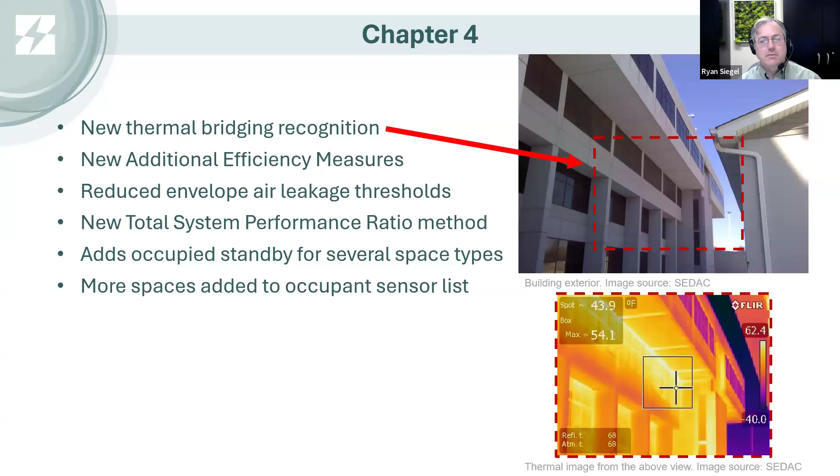We, of course, continue to add more spaces to the occupant sensor list for lighting controls. Also adding dimming requirements to several spaces. So previously we focused on occupant sensing, now adding dimming requirements for many spaces. And that daylight threshold previously was 150 and 300 watts. That is being reduced as, again, controls become more common and perhaps more available and less expensive to install. That cost-effective threshold continues to improve.

And also adding or introducing demand responsive lighting to the code. It's not being added as a requirement, but at least introducing a concept into the code. As well as energy monitoring. This is something that was also added fairly recently to the code. This has been greatly expanded for the requirements to do energy monitoring.

I mentioned earlier about that additional efficiency list being substantially longer and more granularity. So a point is worth a little bit less now, but rather than incrementing, you know, 0.5%, now we can increment in tenths of a percent. So that gives you a little bit more precision when doing this. And also adding renewable energy requirements to the code. So buildings being required to install some renewable energy for that.

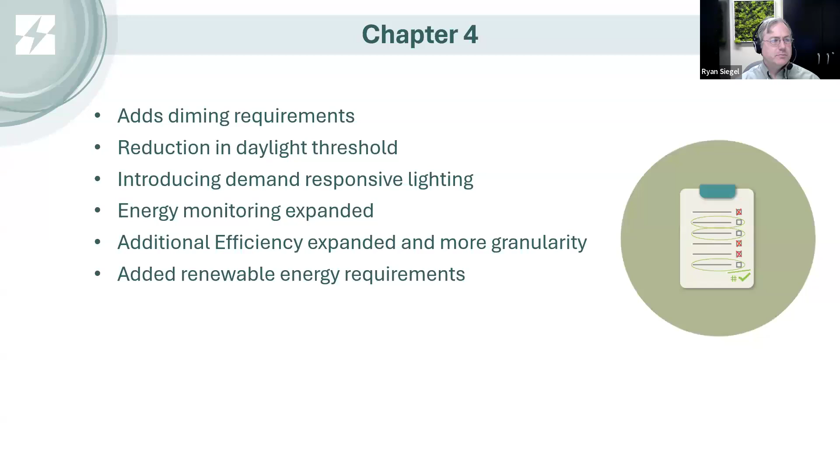Chapter 5 has been greatly revised. You will see a lot of blue text if you go through and look at Chapter 5. Blue text in the online version is denoting new or substantially changed text. So if you go through Chapter 5, you will see a lot of blue text in there. Especially for change of use. Change of use used to be a fairly small section, has a very big impact when you trigger that, but it was fairly small. So this is one area to focus in on because a lot more projects are going to qualify as change of use where in the past they may not have.

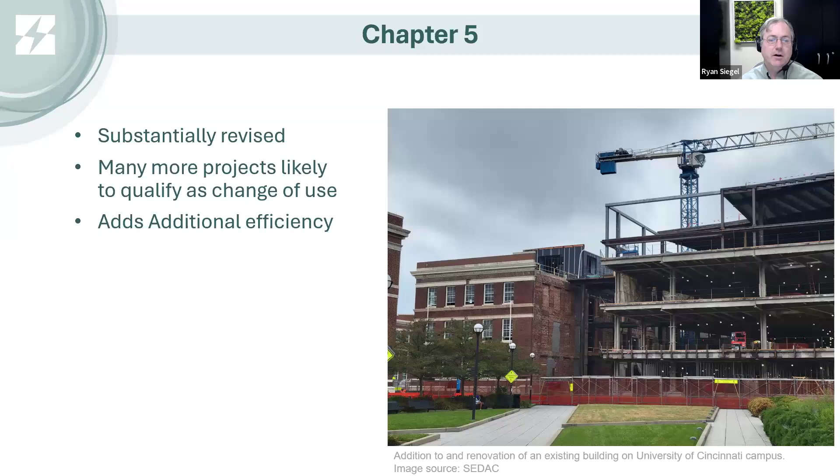So also adds some additional efficiency requirements for additions and large renovations. So whereas previously it's just been very much about whatever you touch, that's what you need to bring up to standard. But as the code is becoming more flexible and saying, okay, rather than dictating this is how you will meet the code, providing that additional flexibility through the additional efficiency measures, which is how do you wish to turn this building up to 11 and give me that little push extra. So for existing buildings, there's now a section to bring additional efficiency into alterations and additions. So those are kind of the highlights of the commercial side.

Looking at the residential side, also see that the intent is greatly expanded and also calls out that the code is focusing on cost effectiveness and life cycle cost, recognizing that every time we bring a new code and the code will improve, often there comes with it some added cost, but recognizing this is balanced with an added benefit over time too. So covering that in the intent and calling that out specifically.

The envelope backstop previously was just a flat backstop, I believe it was referred to an older code. Now the envelope backstop is referring to the current code and is just an adjustment factor. So rather than having to have two code books to do that, you're able to do it with just one. This is more of a terminology, but just want people to be aware. Previously, we used the term UA in the code. This has now been transitioned to TC for thermal conductance. It's a little bit better descriptor as far as what it is. So if you do see TC, we want you to be aware of that change and that it didn't throw you off too much. Also, several new definitions in this code cycle.

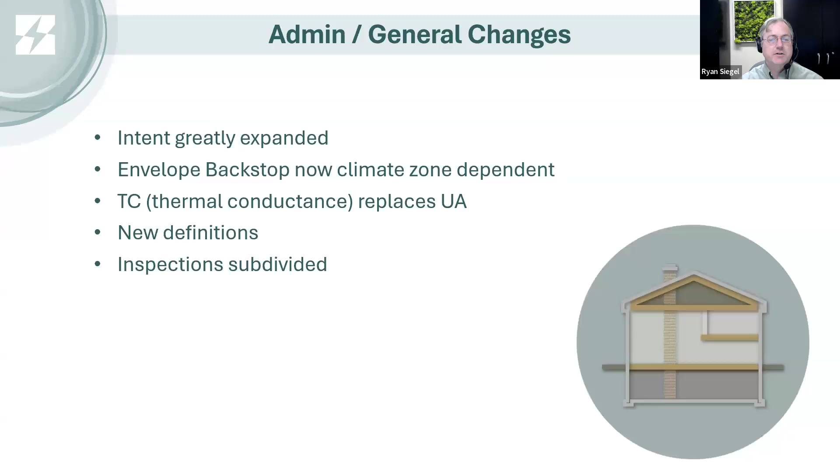Also, trimming that air leakage backstop, similar to the commercial side, that air leakage continues to decrease. Also new to the residential provisions is the multifamily sampling protocol. This previously was in the commercial provisions, but not in the residential. So they've brought that over to the residential.

Also having some new allowances for outdoor systems. Again, previously in the residential, there was almost no provisions for outdoor heating systems. Part of that was because heating systems were required to be sized using a Manual J. Well, if you try to put that outside, there's no way to perform a Manual J to determine the appropriate size of those outdoor heating systems. So trying to align the commercial and residential provisions and borrow back and forth. So these are provisions that previously had been in the commercial provisions that are being brought into the residential side.

Also added some additional requirements for homes and dwelling units that are over 5,000 square feet, recognizing that these very large homes and dwellings represent a very large impact on the energy footprint. And so the code is adding some additional requirements for these larger homes to say, if you're going to build something that large, we want you to go above and beyond just the standard efficiency of those.

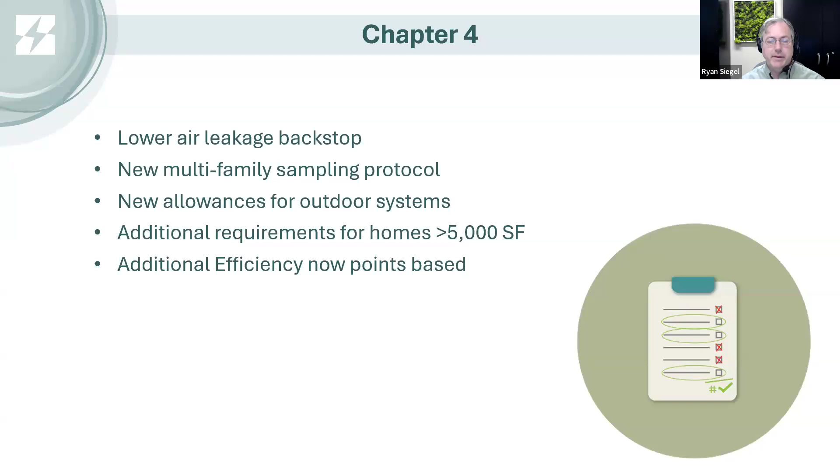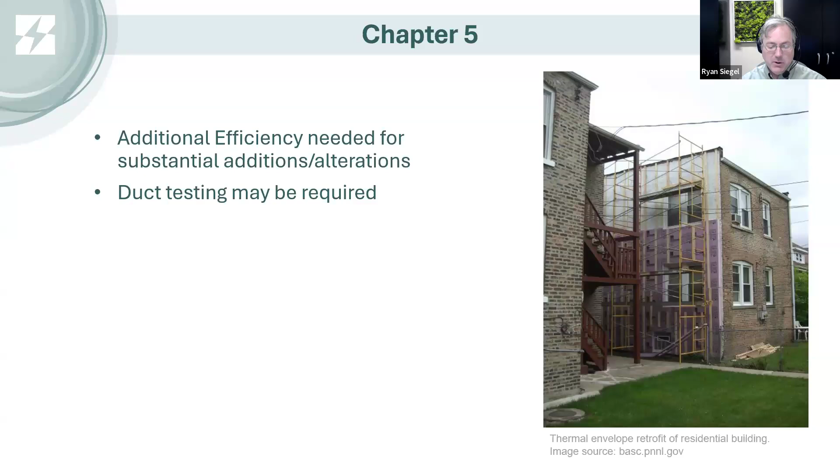As far as Chapter 5, again, for existing buildings, so if you are doing what's called a substantial addition or alteration, or really specifically a substantial alteration. This is a new definition for 2024. There is then the requirement to do some additional efficiency for that. Also for 2024, duct testing may now be required in existing buildings. So if you're doing substantial work to an HVAC system, duct testing may now be required. So kind of the highlights for 2024.

We do have just a handful of amendments for the 2024. That is something Illinois has tried to take a fairly light touch as far as amendments for the 2024 cycle. So if you familiarize yourself with the 2024 International Energy Conservation Code, you'll be fairly well up to speed.

For those of you who do really wish to get into the nitty-gritty, you may find the specific text of the Illinois amendments in the May board packet for the Capital Development Board. It can be a little difficult to read because part of that text is removing the amendments from 2021 and then adding the 2024 amendments. So it can be a little difficult to read. But there's three primary amendments for Illinois, two in commercial and one in residential.

So the first one in commercial is for buildings that don't use heat pumps for heating and domestic water, requiring that they get a couple of more credits in the additional efficiency measures. So an extra 25% more credits. So this represents on a building scale an increase of about 1 to 2% efficiency gain for the entire building.

Part of this is recognizing that combustion heating equipment, or even electric resistance, is substantially less efficient than modern heat pumps that can easily reach into the 300, 400, 500% efficient range. So that's part of what this is introducing, is saying, if you don't use heat pumps, we want this building to do just a little bit extra. And again, this is overall on a building scale, 1 to 2% improvement. So not a dramatic change.

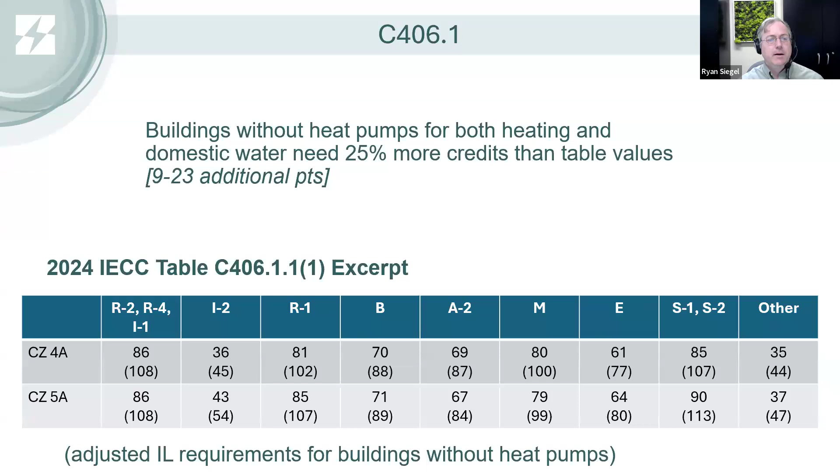The other is electric readiness. So this is something coming over from the Illinois stretch code from the last cycle, adding some electric readiness requirements. You can see here it is restricted to only certain building groups, as well as equipment.

So looking at space heating, connected to a condenser or air conditioner, if you will, 5 ton and less for space heating. So this is not your large, 10, 15, 20-ton units. This only applies for 5 tons and smaller. Similarly, for service water heating, these are smaller units with 50 kBTU. So this is, again, your residential size and scale for this.

Also applying to residential cooking equipment and residential clothes drying. So you see these are more designed to capture residential type uses that may be in commercial buildings. And what this calls out is where you do have combustion equipment that you are bringing a raceway or cable to enable that option of you continue to use gas or electric going forward. So making that ability to have that decision periodically at a much lower cost than trying to install that cable or raceway later.

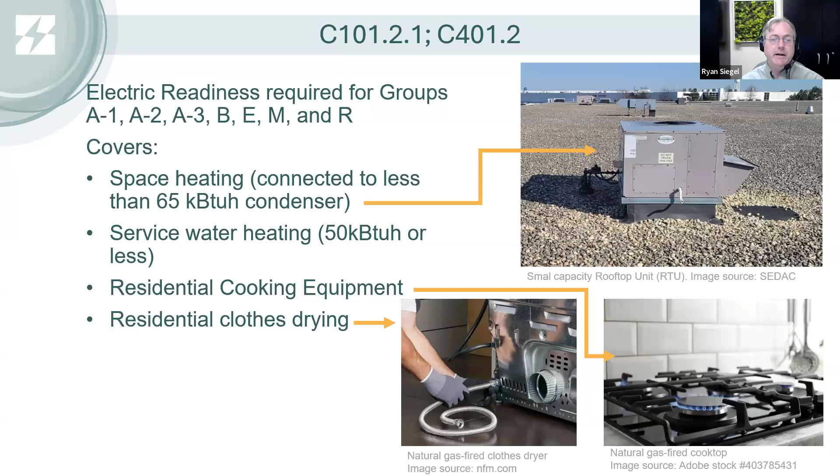So I'm going to go ahead and launch our second poll here. So the first question is electric readiness requirements added to the 2024 IECC by Illinois amendment apply to commercial cooking and laundry equipment. True or false? The second, which Illinois amendment helps to ensure compliant buildings have passive resilience? Electric readiness for small equipment in commercial buildings, a nominal increase in building efficiency for commercial buildings without heat pumps, eliminating the trade-off permitting a worse performing envelope, or no amendments address resiliency.

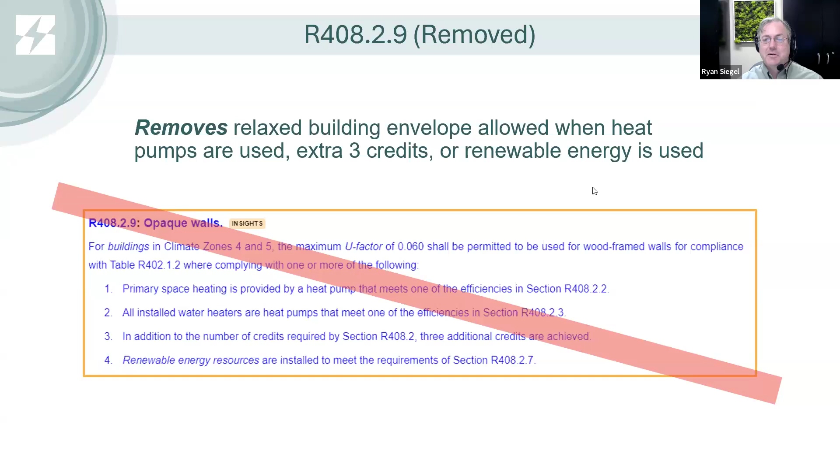Second, okay, definitely some hard questions in this poll. So the correct answer would be eliminating that trade-off, permitting a worse performing envelope. So that's the passive resilience, because again, that envelope is the critical thing for passive resilience. Recognizing that's the part that counts when the utilities are out. So with that, I'm going to turn it over to Robert to start in on our commercial updates in more detail. All right, thank you, Ryan.

Going to keep us moving along here. As I said, we do have a fair amount to cover today, so we may be moving a little bit quickly, but we're going to try to get through all of our slides here.

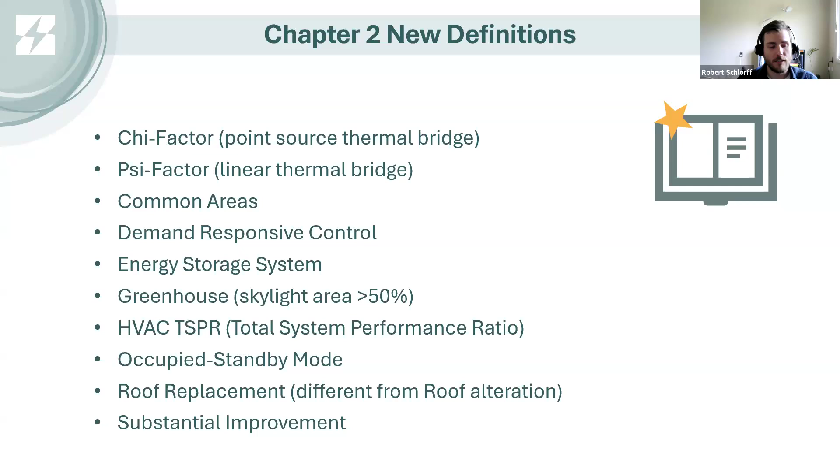So Chapter 2, new definitions. So we do see those Greek characters coming in, the chi and psi factors, those are related to thermal bridging, which I'll cover a little bit more here in a bit. We have a new definition for common areas. Demand responsive controls is defined, energy storage systems, greenhouses. We have to define the new total system performance, HVAC compliance method, occupied standby mode, roof replacement, which is different from a roof alteration, which I'll touch on a little bit later on, and then that substantial improvement definition that becomes a triggering point for existing building projects and whether or not additional efficiency measures are required. So a chunk of the new definitions, this is not all of them, but this is a chunk of them.

Moving on, there have been some updates to the required documentation for commercial projects. So we see here that they've added in documentation of air barrier and air sealing details as well as thermal bridging.

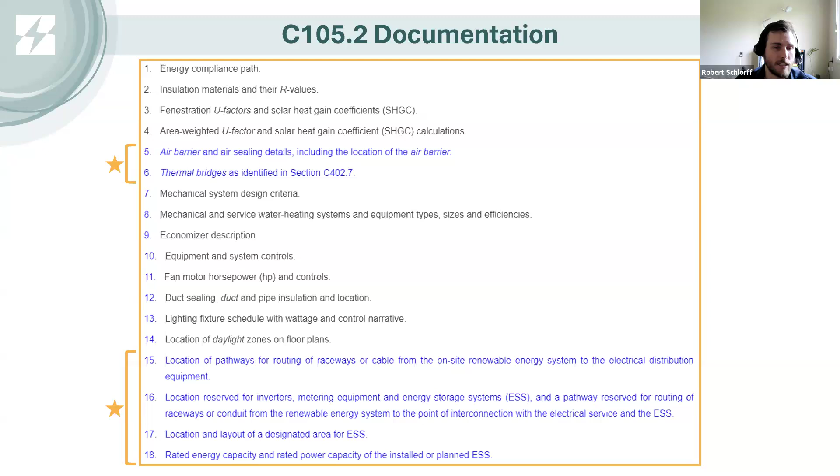So we need to document those elements within the project documentations, the construction documents in some way. We also need to make sure that we're documenting the locations of raceways and pathways for renewable systems as well as specifically marking out areas for energy storage systems if they exist, as well as the rated capacity of those systems that are either planned or installed. So it's a little bit of additional documentation for commercial projects.

All right, so going to talk a little bit about the additional efficiency measures here. And so this is for the commercial side. Increased options and points, as we've discussed. So each credit is now worth 0.1% of an improvement above the baseline. C406 aims for roughly a 7% improvement for each project. So as Ryan mentions, this is how we turn each project up to 11. So that moving up to 11 is about a 7% improvement for each project.

Energy credits must be over and above base compliance. So an example of this is that we can't install better than code minimum windows and take advantage of that in the total conductance, or what used to be UA calculations, and C406. We can only take credit for the better than code minimum windows in one location or the other. So we can't double dip on our measures here. There are some trade-offs allowed.

So another addition to the additional efficiency measures section is a section requiring renewable and load management credits. So that's what the R/LM credits stands for. So there is a little bit of ability to trade off between additional efficiency and renewable and load management credits, but that trade-off is guided within the code. So if you're transferring one way, you have to look at table C406.1.1(2). If you're transferring the other way, there's an equation that you can use.

You can area weight the additional efficiency credit requirements as well as the renewable and load management requirements. They're provided within the code by table based on building type, or building occupancy type. So if your building has multiple occupancies within it, you can area weight the requirements based on the area weighting of your different occupancies within your building.

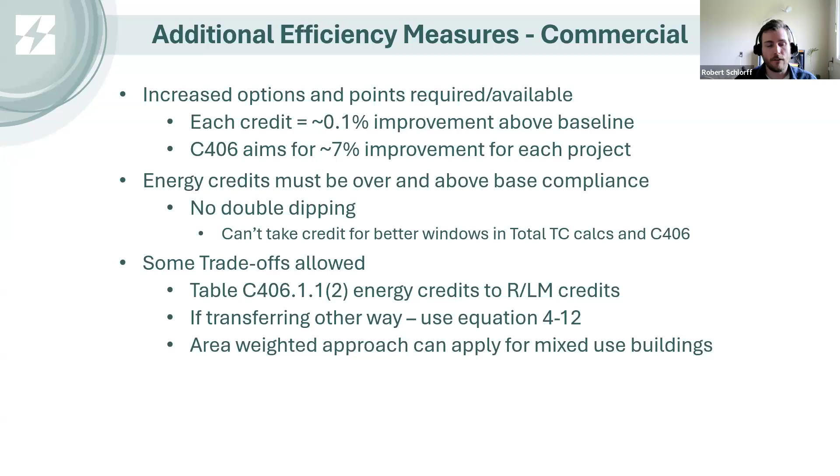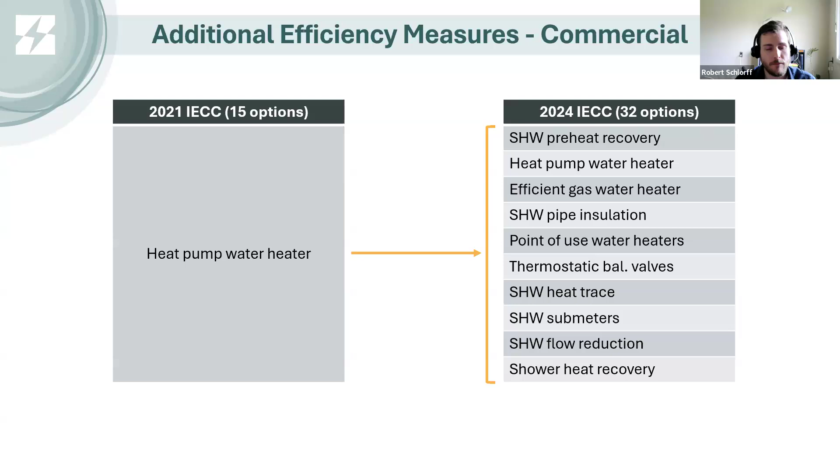So we talked about the expansion of options within the additional efficiency measures. So if we look at 2021 IECC, there were roughly like 15 options. We had one that was associated with a heat pump water heater. Now in the 2024 code, we've got something like 32 options. And as you can see, we have, I think, 10 options that are related to service water heating rather than the single measure beforehand. So this is what we're talking about when we mean that the code has been expanded for additional options and more flexibility for project teams to comply how they best see fit for their project needs.

Breaking down the requirements a little bit further here. So this is the additional efficiency and renewable and load management requirements. So if your project is greater than 2,000 square feet, that project has to comply with additional energy efficiency requirements. If it's greater than 5,000 square feet, we're going to comply with the additional energy efficiency requirements as well as the renewable and load management requirements.

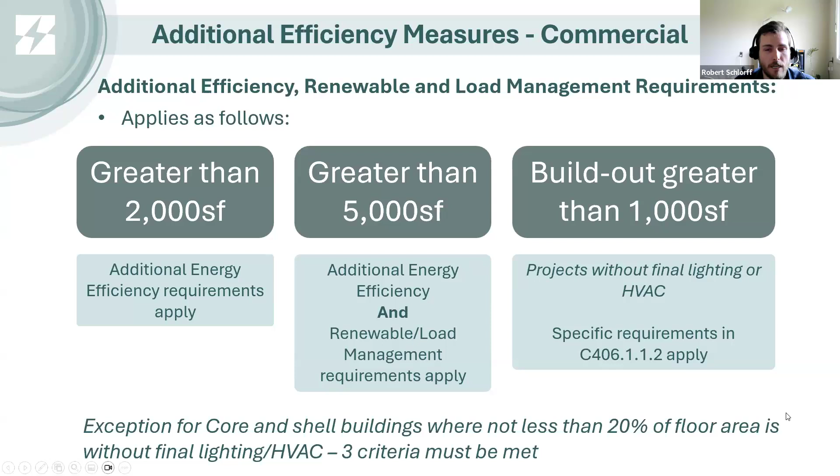And then if it's a build out greater than 1,000 square feet, these are projects without final lighting and HVAC. There are some specific requirements within C406.1.1.2 that apply. There are some exceptions for core and shell buildings where not less than 20% of the floor area is without final lighting and HVAC, but there are some specific criteria there that must be met. But for most projects, remembering these main three categories might be a good start at understanding these new requirements.

Taking a quick look here at some of these tables. So in 2021, we needed 10 points or 10 credits. In 2024, we're going to need somewhere between 35 to 90, depending on the building type and location. If we take a look here at these tables real quick, the point values or credit values in the 2021 table are much lower than what they are in the 2024.

So even for the same measure, the amount of credits offered is going to be higher under the 2024 IECC. So we're requiring a larger number of total credits, but each measure is also generally offering more credits than it may have under the 2021 code. So they're just kind of pushing everything up to allow for more options, and as we said, far more options, up to 32 different options for the measures here.

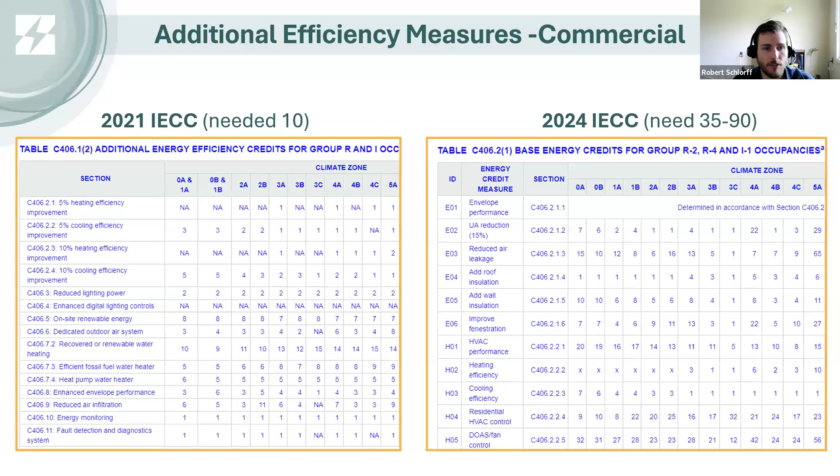All right, so thermal bridging, we'll talk just a little bit further about this, but not too much more today. So the two factors that have been defined for thermal bridging, one is in reference to a point source. So think of like a fastener through an assembly. If it's a metal or a conductive fastener through an assembly, that fastener itself is becoming a bridge for heat to flow inwards or outwards through that assembly.

So these defined terms within the code will tie into the requirements for thermal bridging documentation. And depending on what elements you have in your design, you may have to use both or either of these factors to accurately document the thermal bridges in your project.

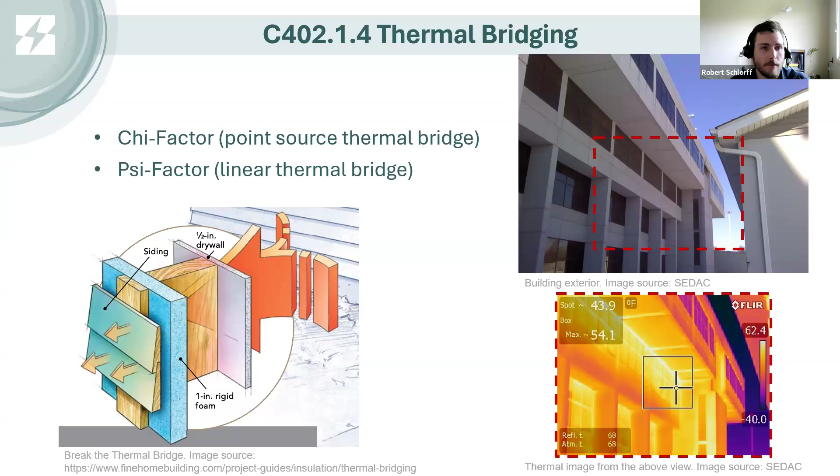So envelope air leakage, as Ryan mentioned, the requirements for envelope air leakage have been ratcheted up a little bit. So the air leakage limit has been reduced from 0.4 in the 2021 code down to 0.35. And this is at 75 pascals of pressure, the test pressure that we do for commercial buildings. There is still kind of the buffer for performance, or the pass with diagnostic testing and remediation. So if the project achieves between 0.35 and 0.45, that project can pass without further leakage testing as long as diagnostic testing and remediation is performed.

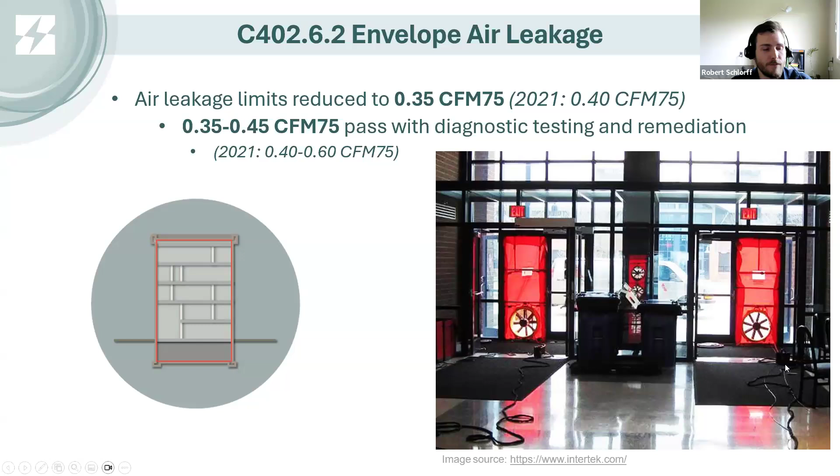This was also available in the 2021, and the limits were 0.4 and 0.6. So it functions the same, but we can see that those limits are reduced. So efficiency is increased within the 2024 code.

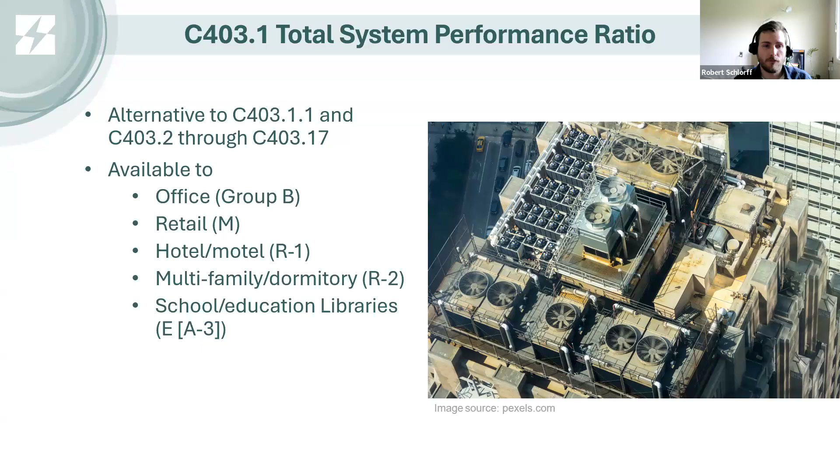But a key here is that this only applies to certain occupancies. And if you can't apply this to your project, then you must follow traditional prescriptive compliance through C403, or your project must go through the performance path of C407. So this is a prescriptive alternative. It still is within prescriptive compliance, but it's an alternative to C403.

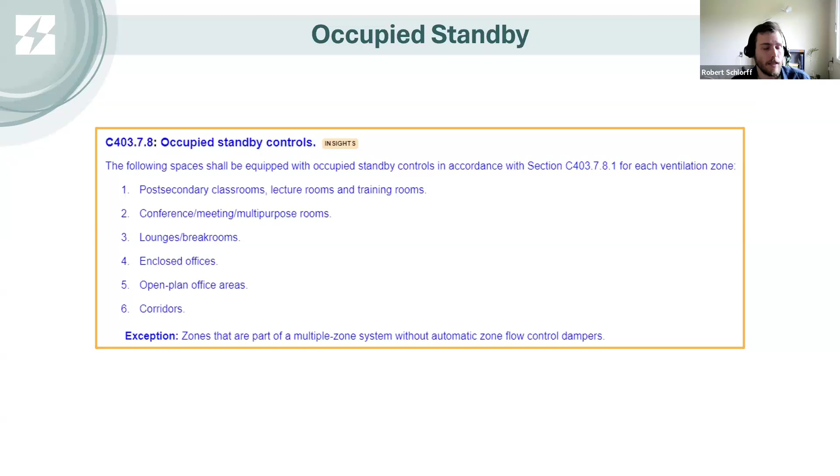Okay, occupied standby. So Ryan touched on this a little bit earlier on, but basically the idea here is that if we have a space that's scheduled to be occupied, but an occupancy sensor indicates that no one's there, we want to be able to adjust the set points within that space because there is no one in there, so we don't necessarily need to have the full airflow and make sure that we're right on our temperature set points. So the spaces listed here need to have occupied standby controls. It's a fairly short list at the moment, but includes things like enclosed offices, conference and meeting rooms, lounges and break rooms. And these controls need to have the functions that are provided in this section.

So we need to be able to adjust the heating and cooling set points by at least 1 degree. It can be more than 1 degree, but by at least 1 degree. And then we need to be able to adjust the airflow supplied to the zone. So basically, if the zone doesn't have anyone in it and it's at set point temperature, we don't need to be providing ventilation air into that space. So that's what these occupied standby controls are for. And then there's also specific requirements for multi-zone systems.

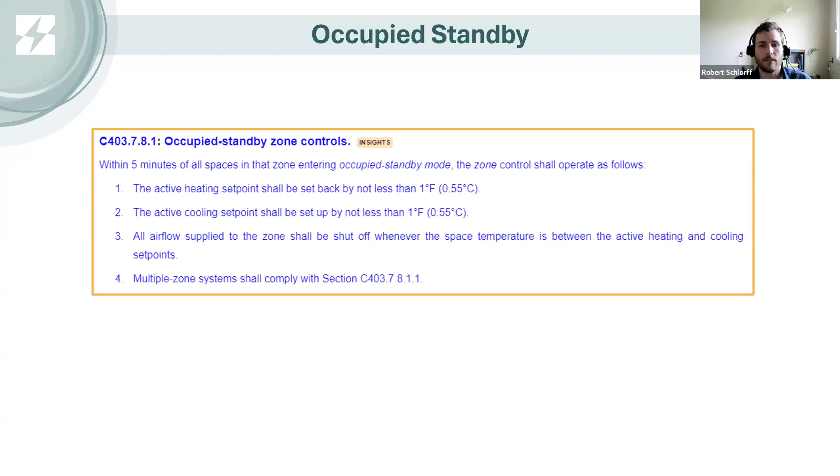Occupant sensors. So getting into some lighting controls, as Ryan mentioned, there are some new spaces added to the occupant sensor list.

So we now have computer rooms and data centers, as well as medical supply rooms in healthcare facilities, laundry and washing areas, and then telemedicine rooms in healthcare facilities. So again, notice that they're being very specific about the healthcare facilities. We're focusing on spaces where patient care isn't provided.

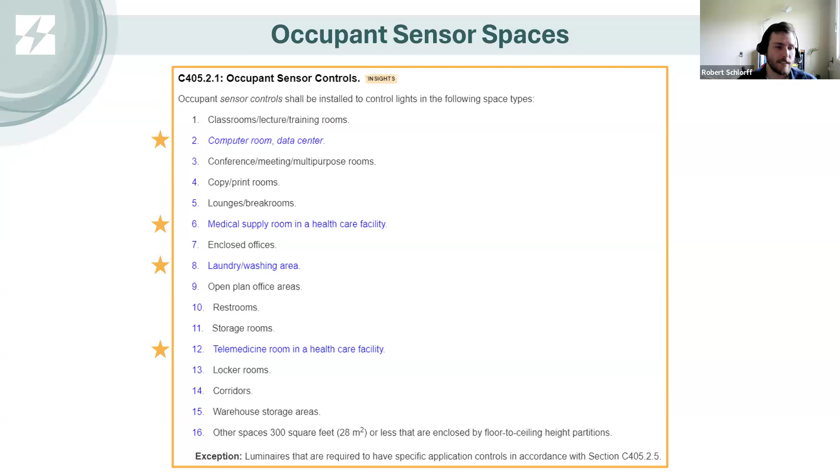Moving on, dimming, we have an entirely new list of spaces that require dimming controls. There is some overlap between the occupant sensor list and this dimming control list, so keep that in mind. But many spaces will also require dimmers under the 2024 code.

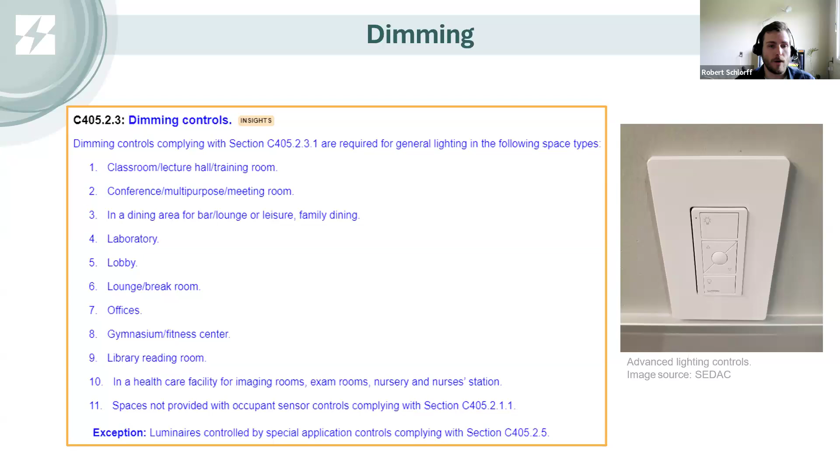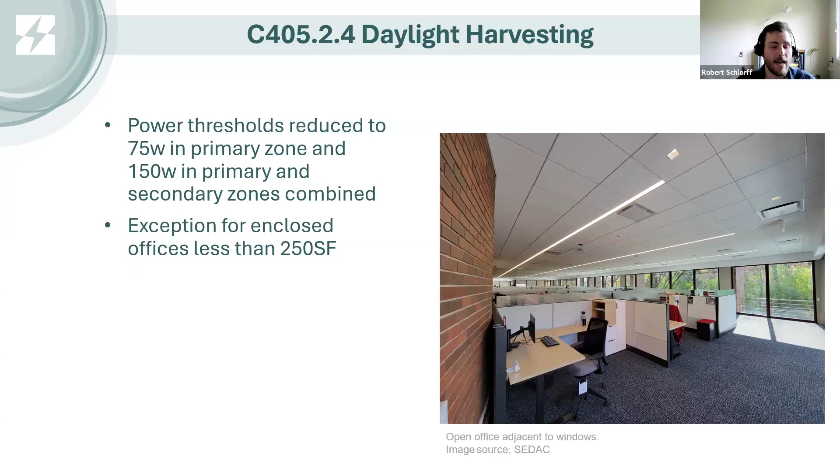Daylight harvesting. Power thresholds have been reduced both in the primary and the secondary zones. And then there's an exception for enclosed offices that are less than 250 square feet. A 250 square foot office would be limited to like 150 watts of total lighting anyway. But the main goal here is to prevent spaces like in the picture from being lit when there is adequate daylight available.

Okay, energy monitoring. So energy monitoring now applies to new commercial buildings that are 10,000 square feet or larger. In the 2021 code, this was 25,000 square feet. On the electrical side, we now need to monitor hot water heating as well as the other items that were previously listed under the 2021 code.

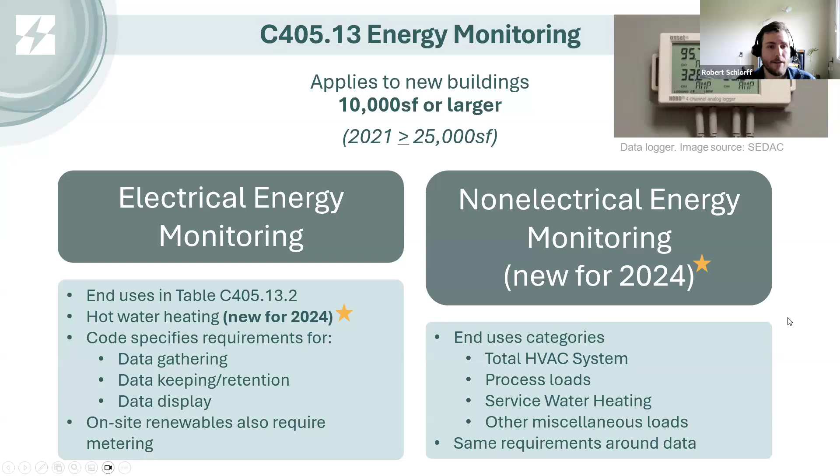And then for non-electrical monitoring, this is an entirely new section for 2024. We want to monitor total HVAC systems, process loads, service water heating, or other miscellaneous loads that may not be electrical loads. This sort of data gathering is really, really helpful in terms of knowing how your building is performing or even knowing what needs to be fixed if it's broken.

Touching quickly on the renewable energy requirements. So this applies to all commercial buildings in climate zones 0 through 7. On-site renewables, there's a requirement to produce 0.75 watts per square foot. This is limited to the gross conditioned floor area of the 3 largest floors. There are some exceptions. However, if the exceptions apply, you still have to provide off-site renewable energy. So no matter what, renewable energy is required, it's just a question of whether it's on-site or off-site.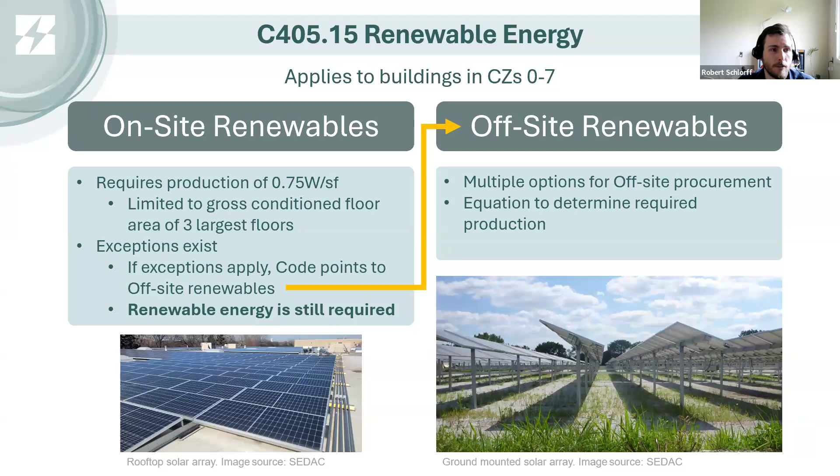As I mentioned, it is 0.75 watts per square foot for on-site systems, and then there are a list of exceptions that will capture situations where on-site systems wouldn't produce very much power or wouldn't make financial sense. So there are some exceptions listed there.

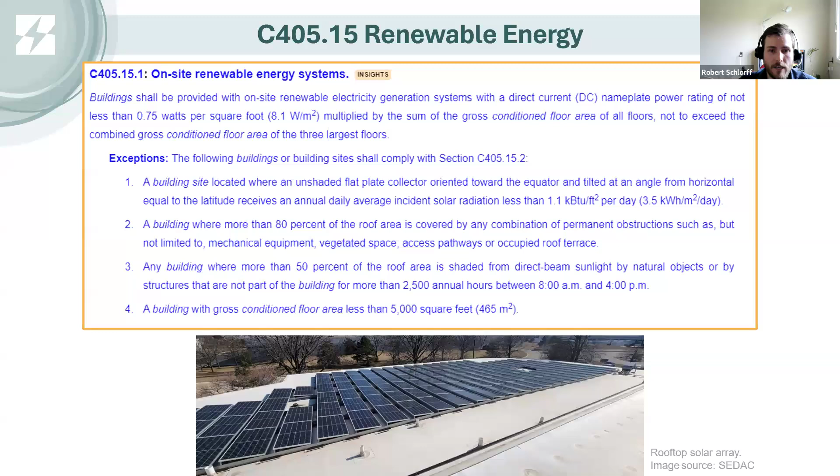The simulated performance path, there has been a change here in the calculation to determine the percent of annual energy cost of the standard reference design. This equation now includes the energy efficiency requirements that would be required for the building type. So basically, the goal or the target of the simulated performance path now includes the energy efficiency credits that would be required if you were going through the prescriptive path.

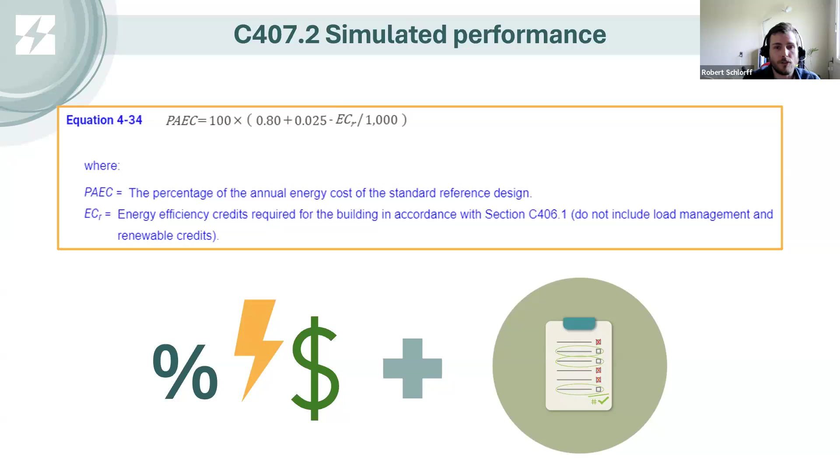So basically, this is saying we've included the additional energy efficiency requirements within the performance path. So if you go performance, you don't have to worry about that. They are included within the calculations.

All right, going to keep moving on here to the existing commercial sections. So, change of occupancy or use, as Ryan said, this is a somewhat big change that could catch a larger number of projects. Certain occupancies only need to comply with C503 rather than C505. Those are listed there at the top. There is a 5,000 square foot threshold for this, so projects that are under 5,000 square feet won't fall under change of occupancy or use.

But the main difference here is that the determination of whether a project needs to comply with the additional efficiency measures or not, or needs to comply with the full change of use requirements, is whether or not it triggers the energy use intensity rank here. Beforehand, the code was phrased something along the lines of if the energy use of the building increases or the energy intensity of the building increases, that was usually determined by an increase in electrical or gas service size or increase in HVAC equipment size.

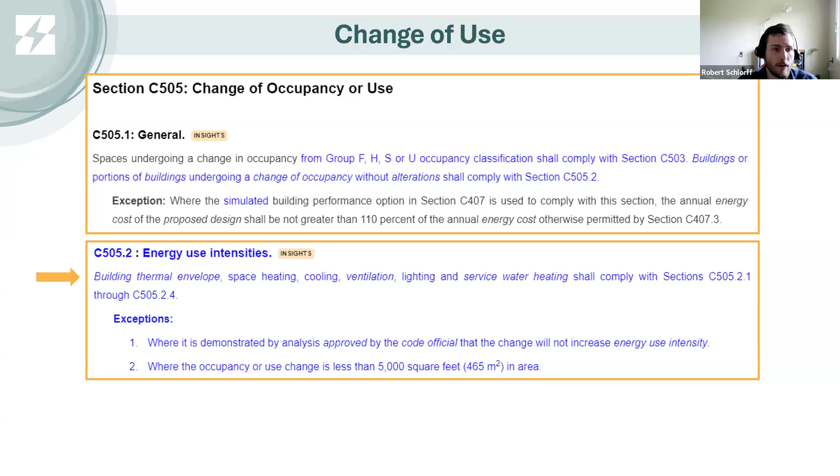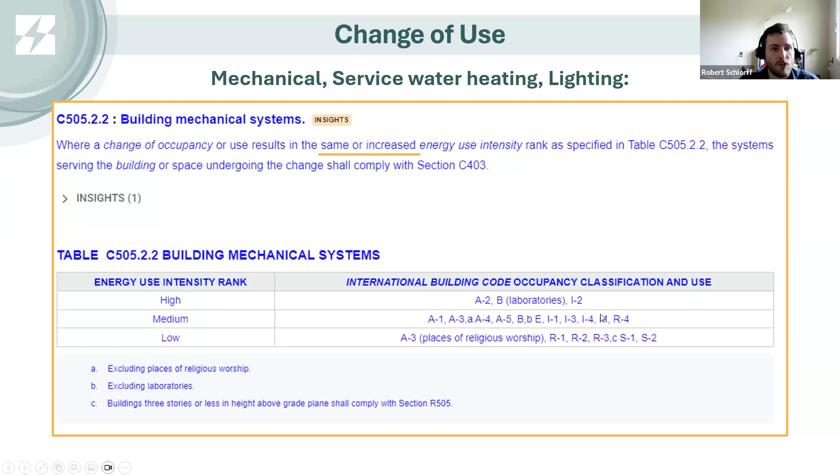Now, there are actually tables, such as this one, that rank energy use intensity based on project occupancy classifications. So the sections are now written such that where a change of occupancy or use results in the same or increased energy use intensity, then it must follow the full C505 requirements as if it were a new building. So basically, if you were moving from an A1 occupancy into a B occupancy, you would have to follow C505 and the full requirements as that is in the same energy intensity rank. So only if you move down would you avoid these requirements.

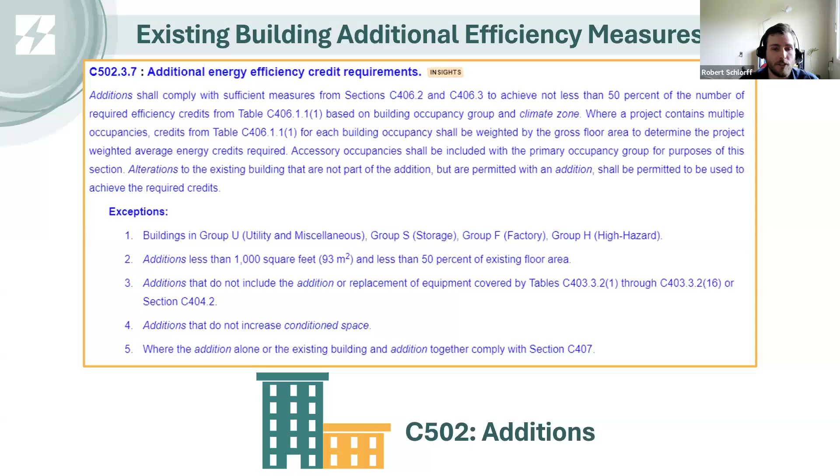Existing building additional efficiency measures. So for additions, they need to achieve 50% of the number of credits required for what the new building would be if it was new construction. So a real quick example here: if we've got a 3,400 square foot commercial office addition, that's Group B occupancy, climate zone 4A, this project needs to achieve 35 credits. If we just go to the table and look, it says 70 credits, but since this is an existing building addition, it's 50%, so 35 credits.

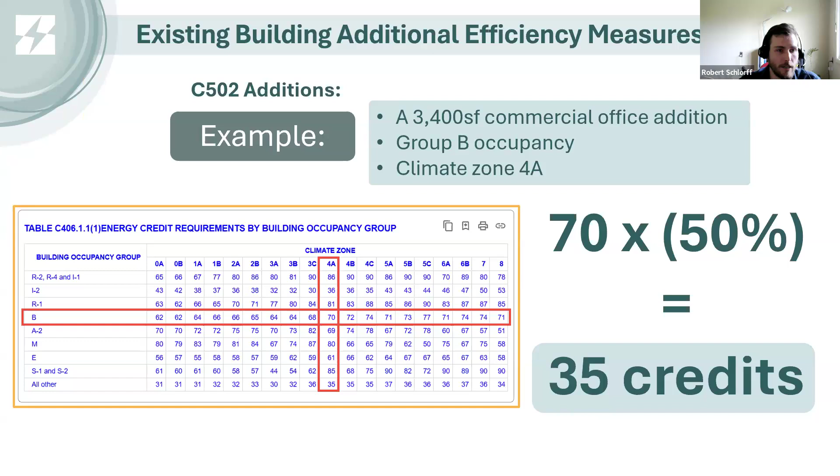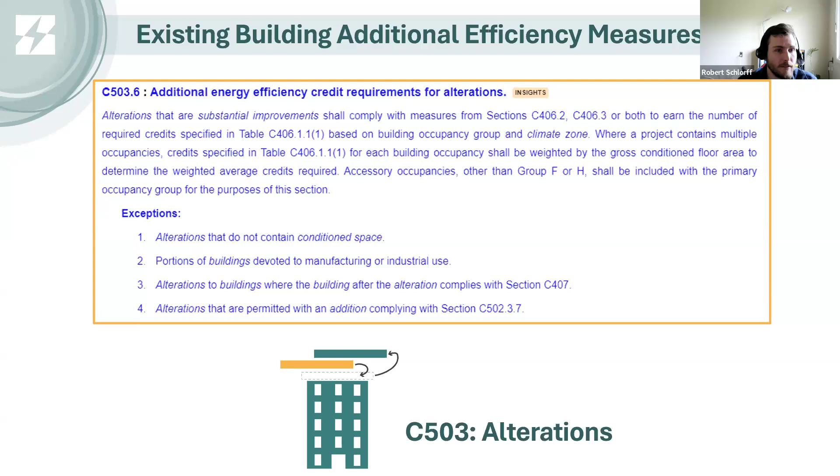Building additional efficiency measures for alterations. This is where the definition of substantial improvements comes in. If the project fits under the definition of substantial improvement, then it must earn the number of required credits that would be required for a new building under C406. So substantial improvement, we have that slide here.

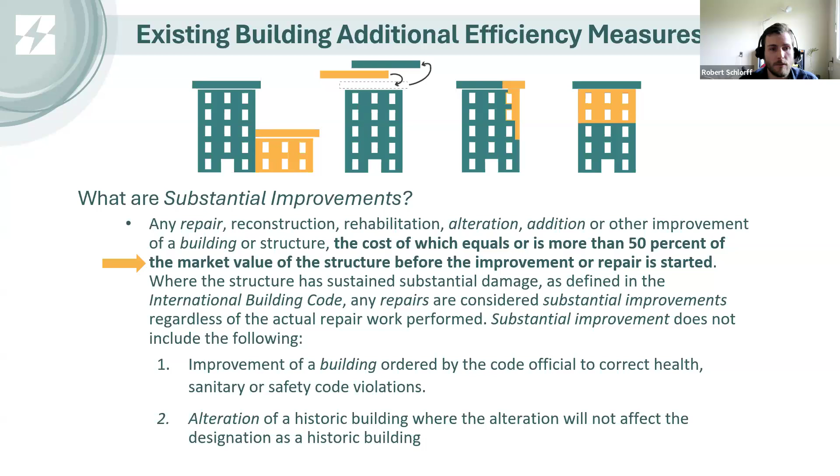Substantial improvement is defined as any repair, reconstruction, rehabilitation, alteration, addition, or other improvement of a building or structure where the cost equals or is more than 50% of the market value of the structure before that project was started. So if you trigger this 50% of market value mark, then the code is going to basically treat that building as a newer building in terms of additional energy efficiency requirements. Okay. Whoops. Moved too quick there.

Another big item that is related to roof replacement projects is that the 2024 code now requires, anytime rooftop HVAC equipment is replaced, the equipment curbs need to be increased in height such that the next time a roof replacement or roof alteration project is done, that curb is no longer an obstacle to installing the full code compliant insulation. So in climate zones 4 through 6, these curbs need to be 17 inches from the roof deck up.

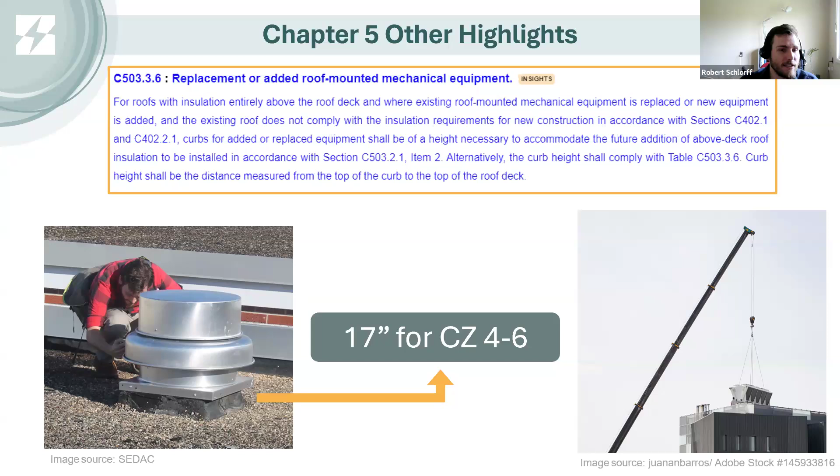So again, this is just basically eliminating a potential barrier to installing full roof insulation, as it is often a fairly expensive thing to get a crane on site and lift this equipment. So we want to get to these curbs when the crane's already there and the equipment's already being messed with.

Okay, so touching on roofing real quick. A roof replacement is very clearly defined within the code as an alteration that includes the removal of all existing layers of the roof assembly materials down to the roof deck and the installation of replacement materials above the existing roof deck. In some discussions through the code development process, we've come to understand that there is another roof project type that is not specifically defined within the code, and that is just a roof alteration.

Roof replacement is a specific type of roof alteration, but a general roof alteration is any altering of the roof system that may require peeling up an existing membrane, removing some insulation but not all, installing new insulation, and then installing a new membrane down.

So the key point here is basically that a lot of roof replacement projects out there are actually roof alteration projects. So make sure that if you're a contractor or you work with contractors who are doing roofing projects, that they're being specific about what project type their project is falling under. Is it actually a replacement of all materials all the way down to the deck, or is it just an alteration that may not include all of those materials down to the deck?

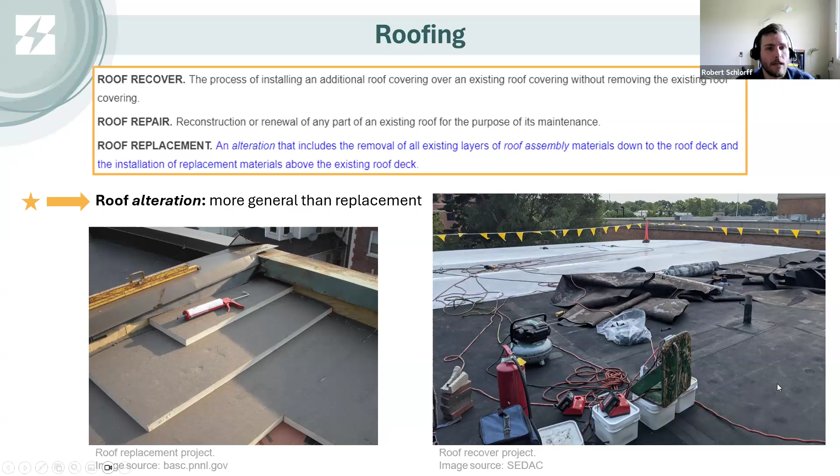All right. At this point, I'm going to launch our next poll question here. So our next poll questions are: how will the updated change of use provisions impact existing building projects? Your options are: more projects will be qualified as a change of use; the entirety of the building will be required to be brought to code regardless of the area being changed; it will enable buildings to meet building performance standards, or BPS.

Second question: why does C503.3.6 require raising roof curbs during equipment replacement? To add cost to projects, to make the equipment easier to access for maintenance and repair, or to enable a future roof alteration project to install the required insulation.

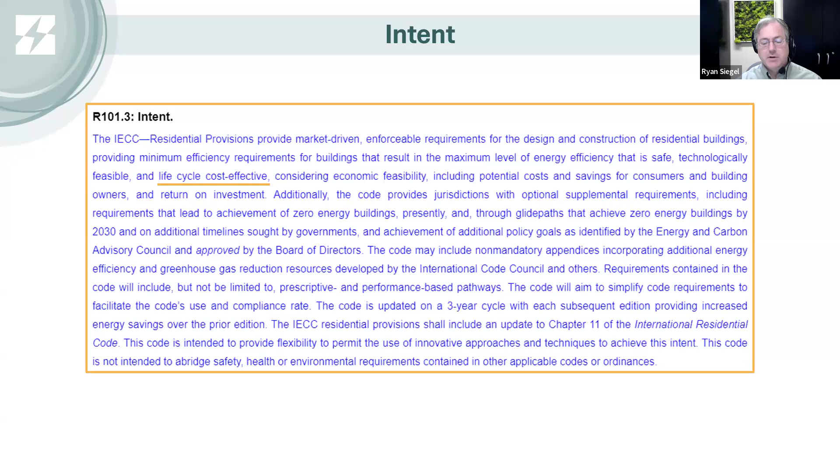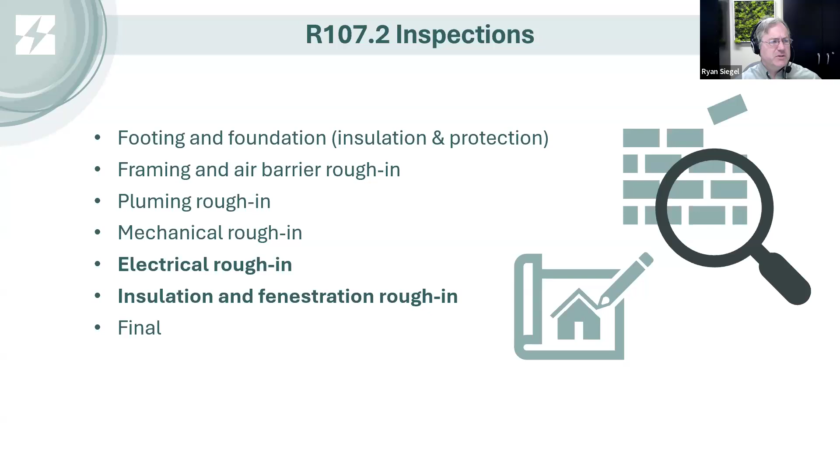So as far as inspections, calling out that they broke out the air barrier from the insulation, as well as adding to the electrical rough-in inspection, with more and more controls being required. So inspections have grown in the residential provisions.

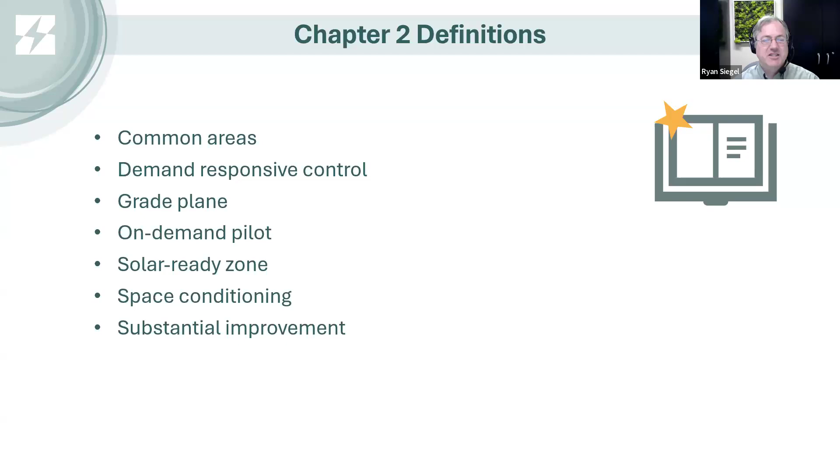So a few new definitions: common areas, demand responsive controls, grade plane, that's a new one for the residential, and on-demand pilot. The code has not permitted continuous pilots for some time, especially for lighting fixtures. So adding on-demand pilot, solar ready zones, as we're now adding renewables, or at least provisioning for renewables into the future, space conditioning, as well as substantial improvement has been added for residential.

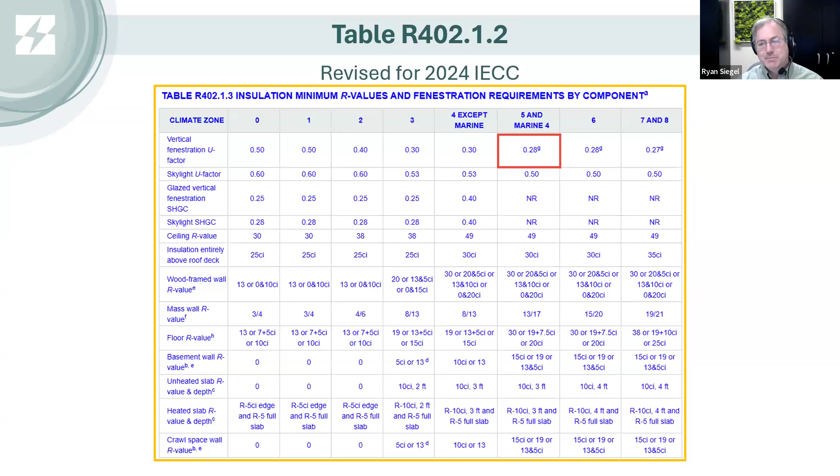So this is a note as far as when you look at the table. This table has been transposed, which is why the entire table is in blue, even though for our climate zones, it's only the vertical fenestration U-factor that's been improved slightly. It's moved from 0.3 to 0.28, but the entire rest has been the same. So the table, they've just pivoted the rows and columns for that. So just being aware. Some of these changes have not been nearly as dramatic as they show up in the text.

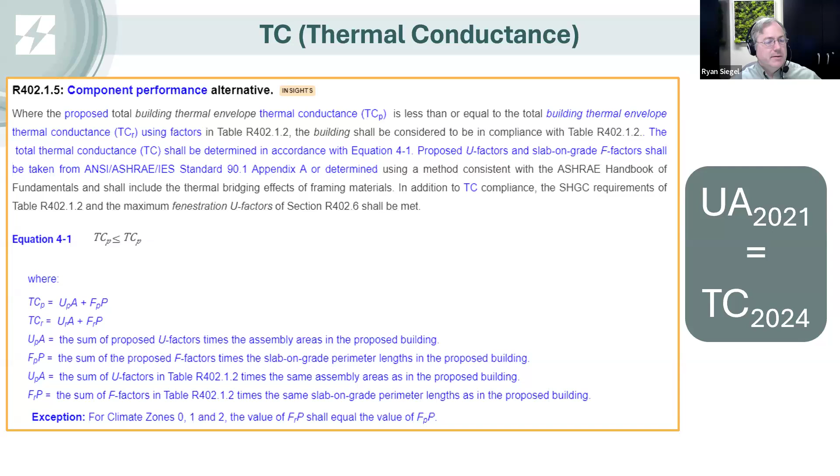So here again for component performance alternative using the TC rather than the older UA standard for that. Well, this table continues to be adjusted over time, R402.5.1.1. You see here knee walls have now been added to this table.

This is a really good table to key in on, as oftentimes most of the building science and building issues we encounter go back to things that were missed from this table. As you notice, this is for air barrier and air sealing criteria, along with insulation installation criteria. So these are some very good things to key in on as far as designs and inspections.

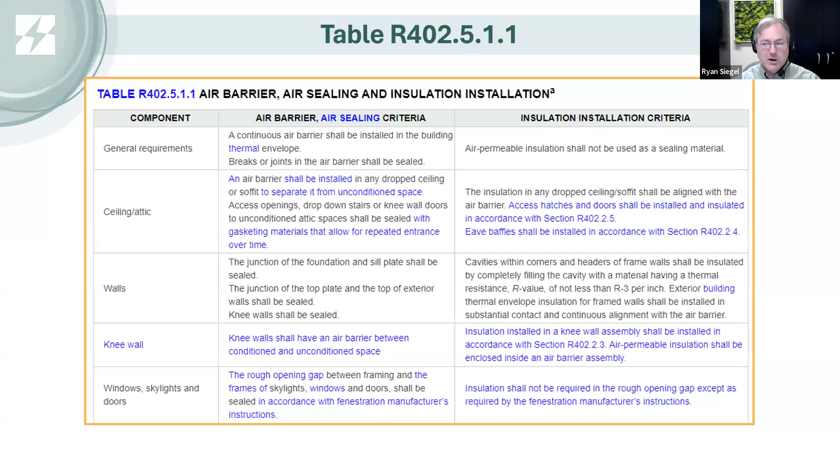Mentioned about unit sampling, so recognizing you might have a commercial, a residential building. Apartment buildings can be rather large and still qualify as residential buildings, as they would be 3 stories or less in height. So sampling allows for sampling of 20% of units. So if you've got buildings with 8 or more, you've got to test at least 7 or 20%, whichever is more. There's also a provision in here where in the event that a unit does not pass, additional testing is required. So again, this is similar to the commercial provisions.

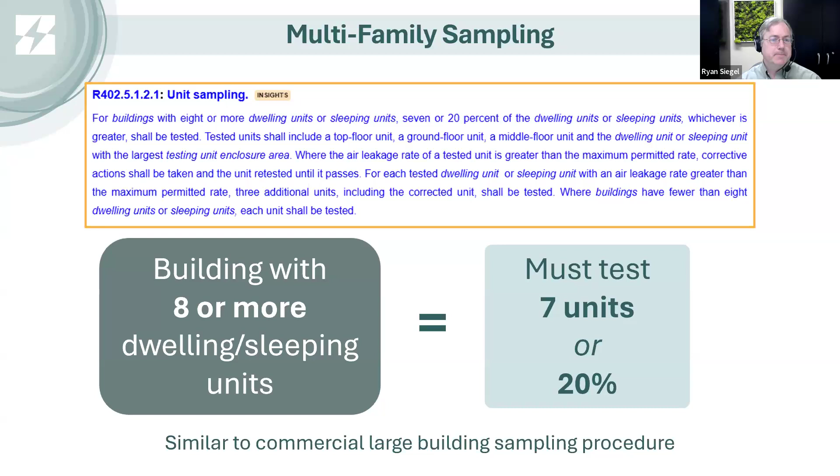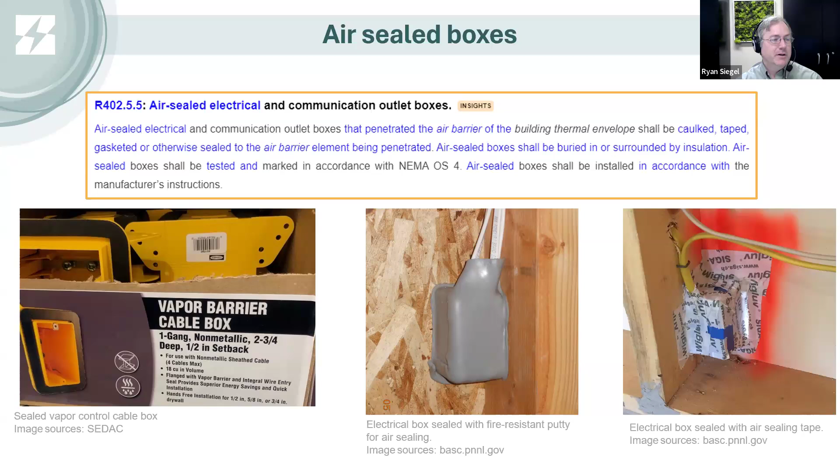Air sealed electrical and communications boxes. So this is for boxes that actually penetrate the air control layer or your air barrier. So one of the things to key in on is identifying where is that air barrier and is this box penetrating that. Part of this is also making sure that you install it in accordance with manufacturer's instructions, as oftentimes there is some additional sealing. It's not just the product, but it's a product with installation method to achieve that. So making sure we follow those manufacturers' directions.

Duct leakage has now been added based on the number of ducted returns. So systems that have more returns often are able to provide better airflow at lower pressures. So in operation, that's where they're giving you some additional allowances for air leakage if you have more returns or more ducted returns specifically. So this table has grown. Previously, it was 3, 4, and 8. So you also see there's an additional row in here for space conditioning equipment.

It's not installed, but the ductwork is located entirely in conditioned space. So previously in the 2021 version, it didn't specify whether the equipment was installed or not. So few changes for duct leakage.

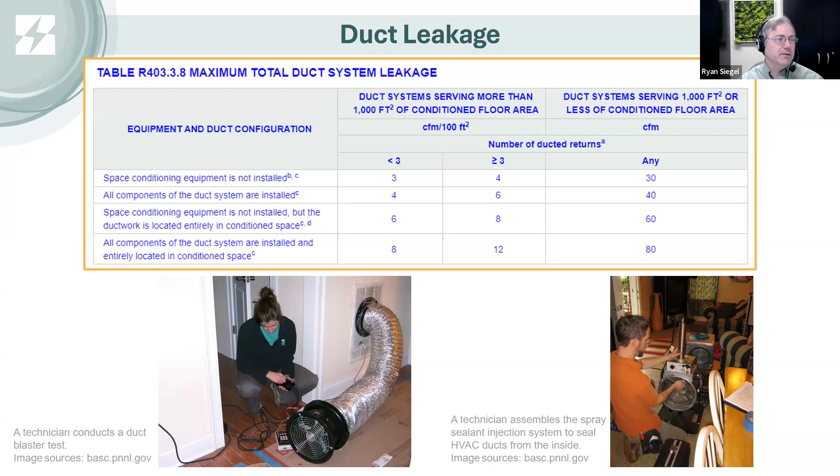Pipe insulation, previously it said just an R3 for the pipe insulation. Now it calls for a 1-inch thickness of pipe insulation. They also do have a conductivity range there as well. So if you wish to use a different material of a different thickness and not just automatically go with the 1-inch, that was determined based on that conductivity, and there is a provision to allow you to use a different thickness if you use a different conductivity insulation for that.

But this is going to be an increase in insulation, as you see in this range, moving from an R3, we're now moving up into almost an R4 or R5, depending on your temperature rating.

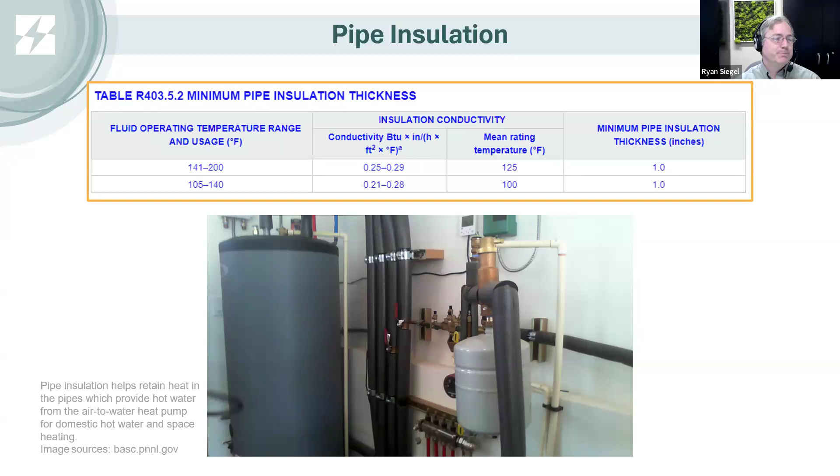So toilet exhaust. This is another notable change: it now requires either a time control, occupant sensor, humidity control, or contaminant control for that. So just your standard toggle on-off switch is no longer permitted for intermittent exhaust control for bathrooms. So you now have to have some form of automatic control so that we don't end up inadvertently leaving the exhaust fans running for hours on end accidentally.

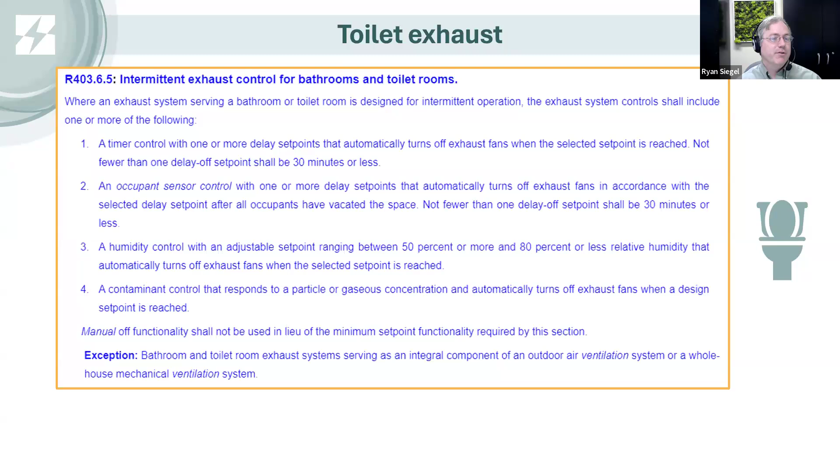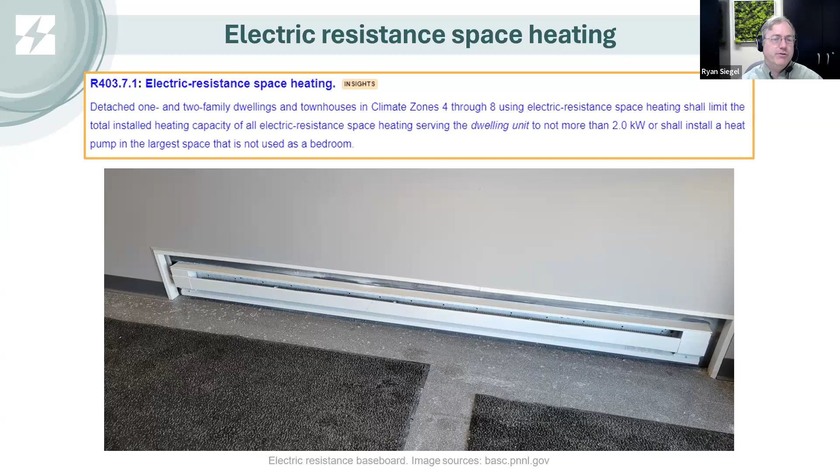Electric resistance. So if you have detached 1- and 2-family dwellings and townhouses, if you do not use heat pumps, you are limited to no more than 2 kW of all electric space heating for a dwelling unit. So being aware of that. So you do need to use a heat pump if you wish to have heating larger than 2 kW for a one, two family dwelling or townhouses.

Mentioned bringing the outdoor heating provisions over from the commercial side, so now allows for heating outside. These do need to be radiant as well as controlled by an occupant sensing device or a timer switch, such that we don't accidentally leave these on when no one is around presently.

As well as some new controls for roof and gutter de-icing. So you'll notice here talks about moisture sensors, because obviously we don't have to de-ice if there is no moisture present. And then similarly, daylight, so we're trying to minimize the operation of these.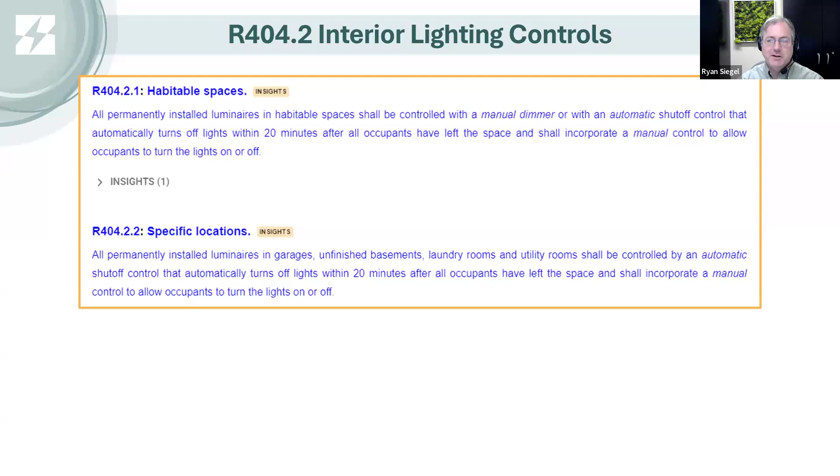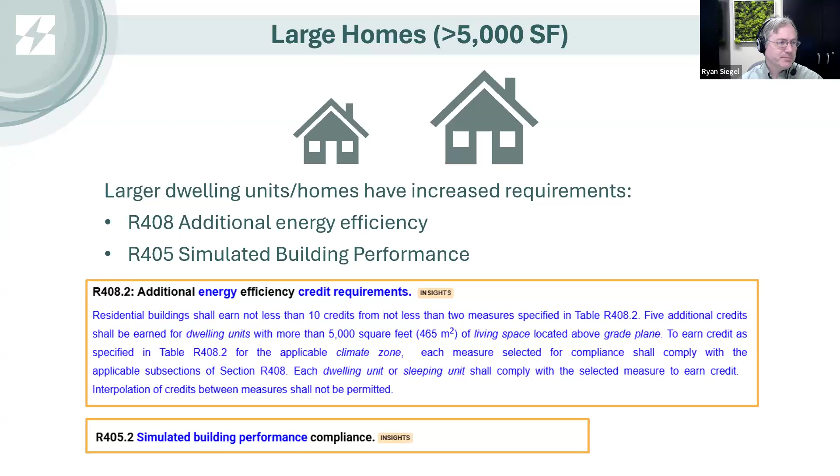For large homes. So if you're over 5,000 square foot per home or per dwelling unit, now you have some additional efficiency measures for this. Well, and similarly, simulated building performance requires an additional 5% improvement for these large homes. So here's just a brief example.

So if you're doing a new residential building, you got to pick up 10 additional efficiency credits, and you have to do at least 2 different measures. Part of this is there are a handful of measures that you can get 10 credits. But this is encouraging designs to take a holistic perspective and make sure you're improving the whole building, or at least multiple systems, rather than just picking the one measure because, oh, that gets me my points, and so I'll just grab it without taking a look at the broader picture.

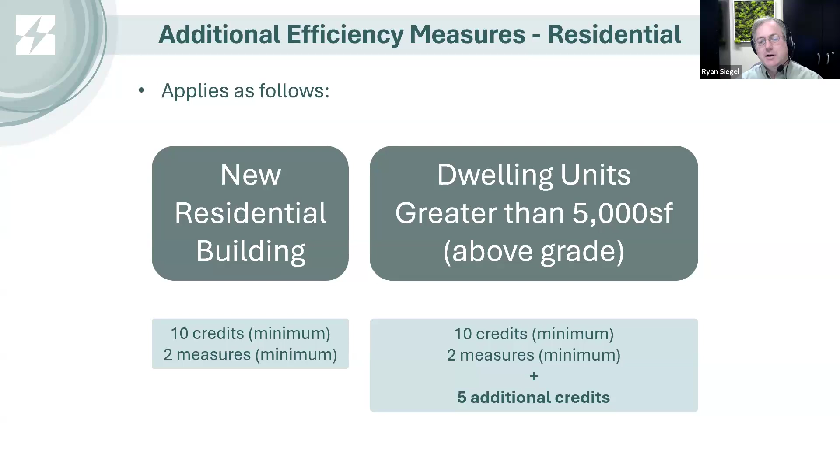So, and again, for dwelling units over 5,000 square feet, they have to have 15 total credits spread across at least 2 measures. So here's a look at what that table looks like for the additional efficiency measures. You notice here in climate zone 5, you know, if you get to a 30% reduction in your total thermal conductance, you can actually pick up 11 points.

But saying, okay, we want to make sure that you don't grab all of your points just from this one reduction in TC. Now, to be fair, you're probably going to pick up something from another category while you're doing that as well. But we don't want you to be double dipping. So as Robert mentioned earlier about double dipping, so if you say, okay, I'm putting in better windows, I can't take both of those measures necessarily together automatically. You have to make sure that you have segregated your improvements between your 2 measures.

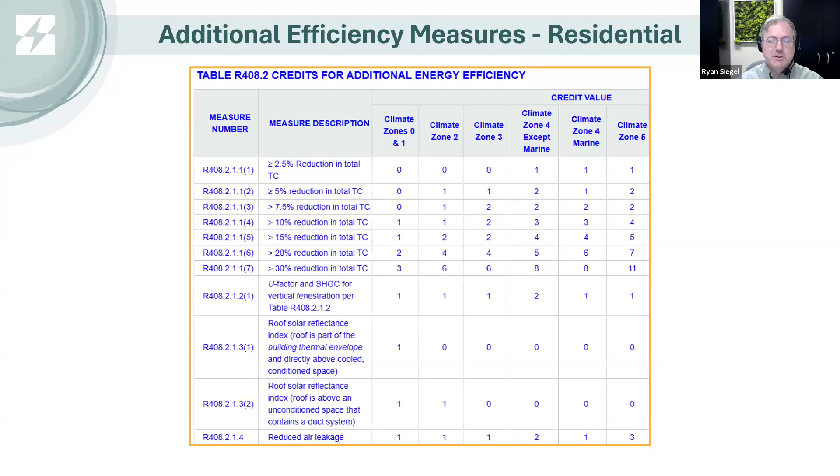For simulated energy performance, recognizing we've seen a lot more of this under the 2021, and probably we'll also see this under 2024. Again, for dwellings larger than 5,000 square feet, picking up an additional 5% annual energy savings.

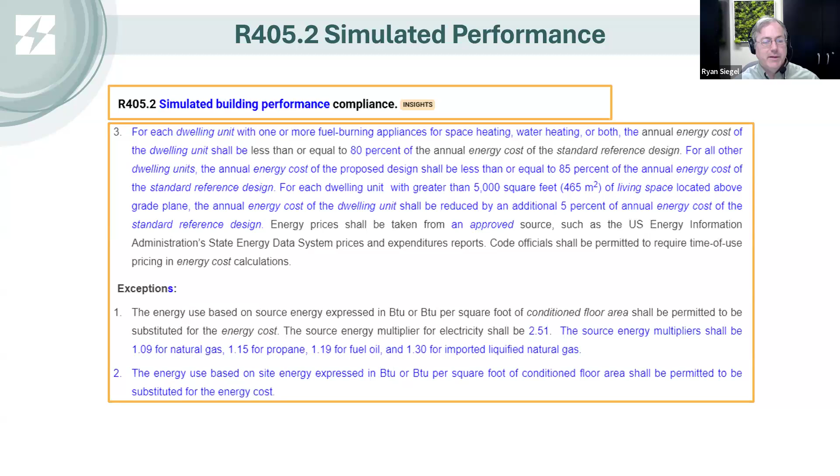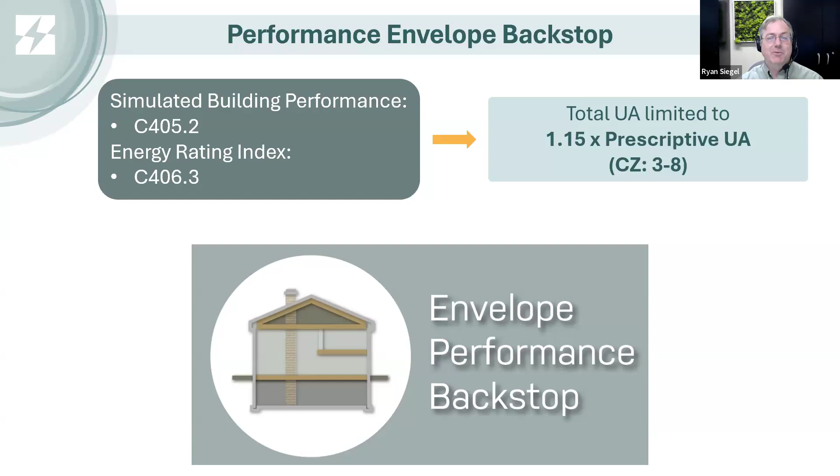As far as the performance envelope backstop, it is now based on just 115% of the current code cycle. So rather than looking back to an older code version and saying your envelope can't be worse than this, they just say your envelope can't be greater than 115% of what's allowed in the current one. This applies for both simulated energy performance as well as the energy rating index path. That way you only have to look up one code, and because you end up needing to calculate your prescriptive UA anyway, you just multiply that by 115% to get your backstop.

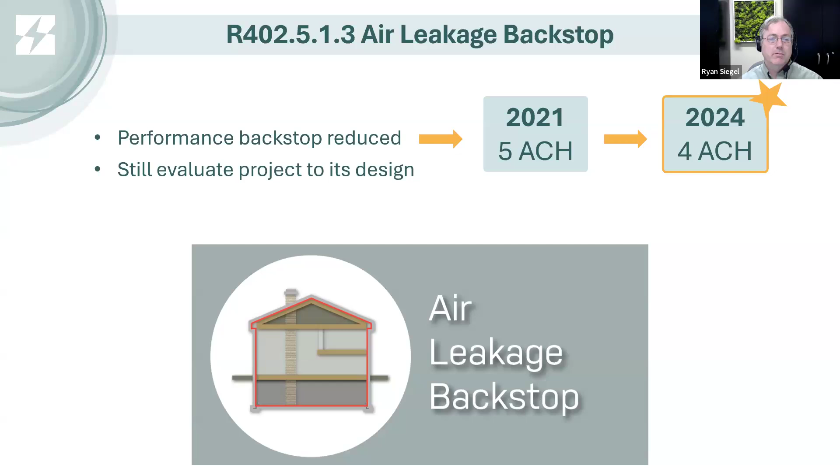Air leakage previously under the performance path was limited to 5 air changes per hour. That has now been adjusted downward to 4 air changes per hour. However, projects are still evaluated based on their design. If the designer called for an envelope to be 2.5 ACH, that is what that building is evaluated against, not this 4 air changes per hour backstop. It just means that even under simulated energy performance, if they modeled a 6 air change per hour leaky envelope, the test would still have to meet 4 or less, because that backstop would then apply.

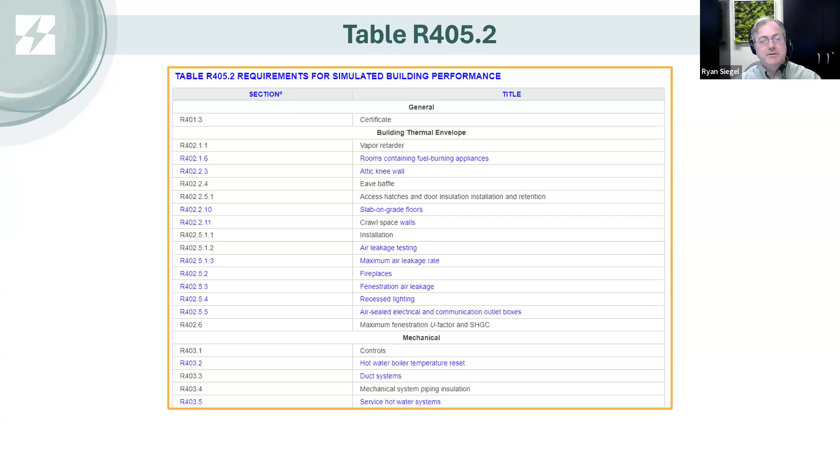Looking at building performance, several things have been added. Buildings using simulated energy performance have to meet all of these different requirements, including things such as rooms containing fuel burning appliances, slab on grade floors, etc. So we still have to do air leakage testing for this.

For existing buildings with substantial improvements, very similar to commercial, where it's greater than 50% of your market value, that is a substantial improvement. If you do this, you have to pick up at least 3 credits. So rather than new construction where you pick up 10 credits, under substantial improvement it's just 3.

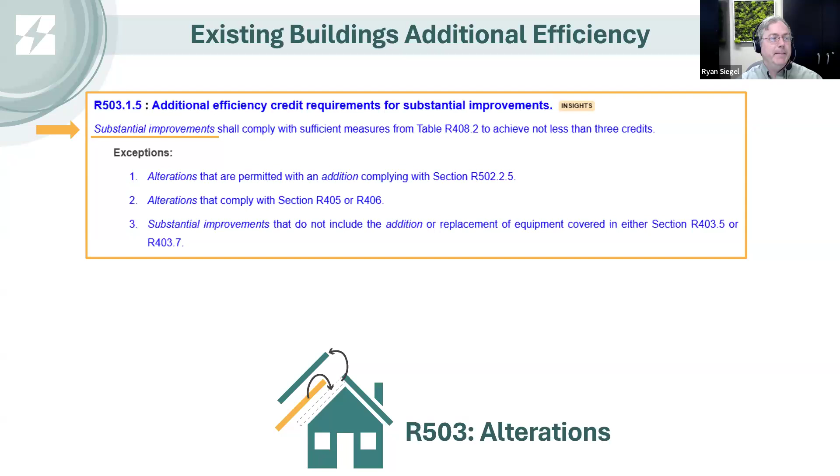Existing building duct testing. If you are modifying or changing 25% or more of the registers or the total duct length, then you need to do duct leakage testing in existing buildings. 25% gives you a fair bit of flexibility. Part of this is just verifying that the system is reasonably intact.

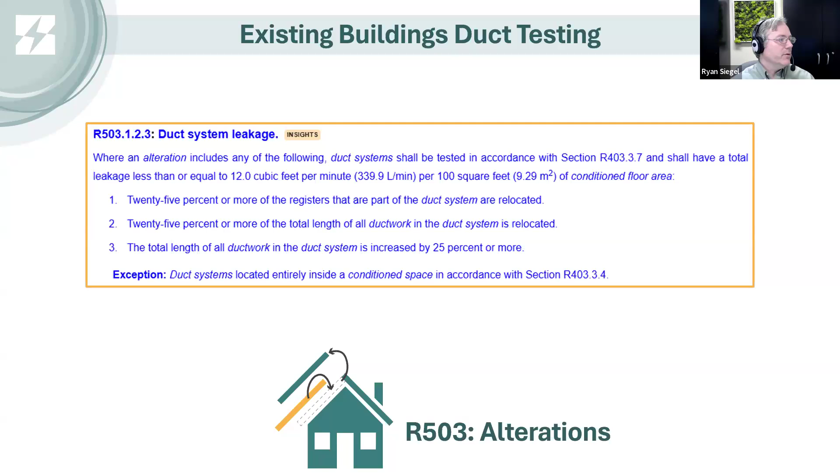With that, got one more poll here. Which of these is new for the 2024 IECC? Building electrification for residential buildings, increased wall insulation requirements, or additional requirements for dwellings larger than 5,000 square feet? Question number 2, which of these are Illinois amendments? Electric readiness for small equipment in commercial buildings, nominal increase in building efficiency for commercial buildings without heat pumps, or eliminating the trade-off permitting a worse performing envelope.

I do see a couple other questions here. A good question: the State of Illinois Electric Vehicle Charging Act. That is separate from the Illinois Energy Conservation Code. They are closely related, but they are different from each other. It is not being incorporated into the energy code per se, but the Illinois Electric Vehicle Charging Act still does apply for buildings and projects out there.